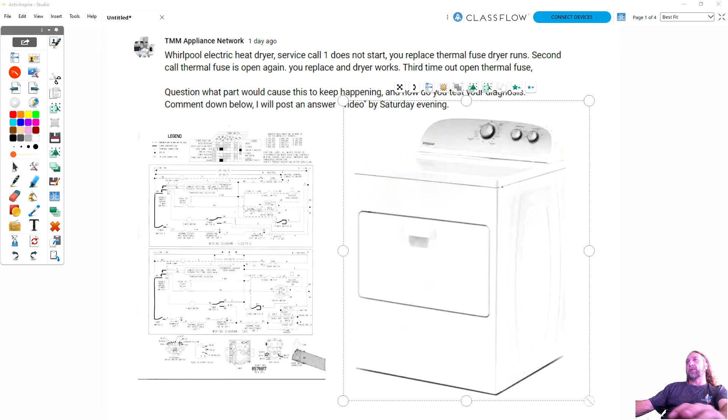This is an actual problem that happened to me in the field. And there's just some of those things that just stick in your head you never forget. So before I go real deep into this, I do want you to watch this video I got from Whirlpool's website. I can't get this screen to minimize, 1 second. Okay, and this video is made by Whirlpool, and it's going to talk about the air circulation. And this is important to know so I can explain to you what parts are there for what purpose, because in order to troubleshoot you need to know what those parts are there for.

Optimum drying performance is achieved through good airflow because good airflow pulls in outside air, heats air and blows it through the tumbling load, removes moisture from the load, deposits lint on the lint screen, and exhausts damp air. To ensure good airflow, clean your lint screen before every load by rolling the lint off the screen with your fingers. Do not rinse or wash the screen to remove lint. Warning: fire hazard. Use a heavy metal vent. Do not use a plastic vent. Do not use a metal foil vent. Failure to follow these instructions can result in death or fire.

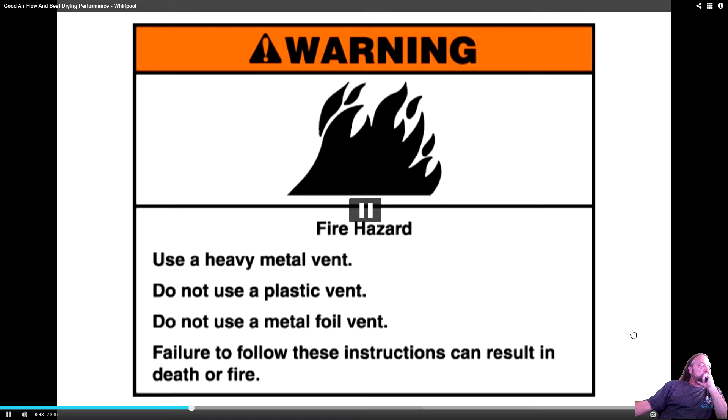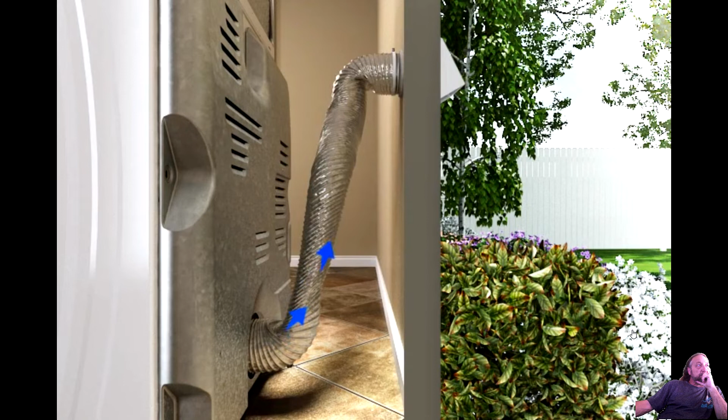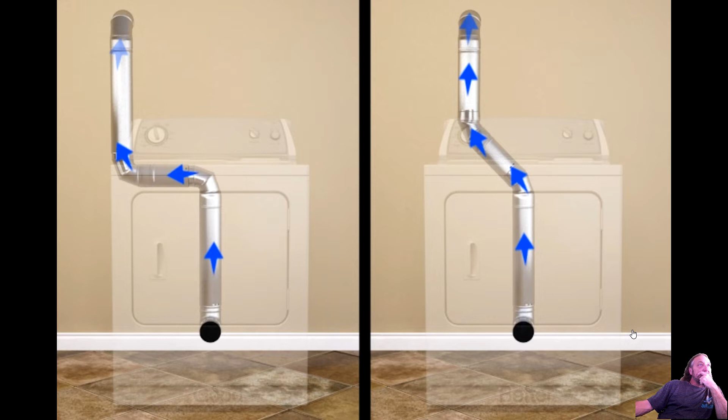Fully extend and follow the instructions of the dryer vent tag attached to your machine to ensure the minimum dryer distance from the wall. The excessive flexibility of foil and plastic vent material slows air movement, traps lint, and can be easily crushed. Replace plastic or metal foil vent material with heavy, rigid vent material that is 4 inches in diameter. Remove lint and debris from the exhaust hood. Remove lint from the entire length of the vent system at least every 2 years. Because dryers are limited in the distance they can move or blow air, be sure your system uses the shortest length of vent possible. Refer to the Use and Care Guide to determine the recommended vent length based on your model and installation.

Okay, I wanted to stop this video here because I got a lot of responses from people saying that the problem with the thermal fuse going bad was that it was a dryer vent problem. And believe it or not, that's what I thought. When I first went out there, I checked the hose behind the dryer. There was plenty of room. I mean, there must have been 3 feet on either side of the dryer. The hose ran maybe about 8 feet long and went to a pipe right out the wall on the side of the machine.

So I checked the hose, didn't seem to be kinked, connected everything back up, and blew the fuse again. So then I went outside, and where the vent is on the wall, I noticed that there were about 4 or 5 plastic bags of dirt stacked up right underneath the vent coming out of the wall. And I said, oh, well, maybe the bags were blocking the airflow. And I moved the bags, and it blew the fuse again.

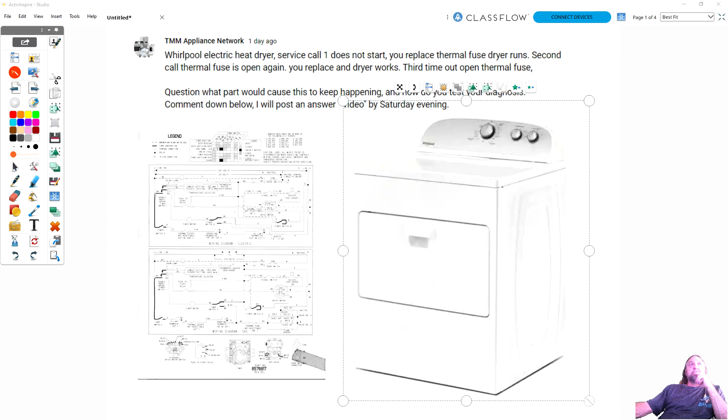This is when I said, wait a minute. This cannot be airflow. So let's take a look at this, and let's take a look at the back of the dryer. And let's identify 4 key components here. Okay, the first component is going to be my thermal fuse itself. I'm going to go ahead and put an arrow right here. That is our thermal fuse. That is the same as this one right here. And that's the one that is blowing, because that's the one that's controlling the motor.

But it's important. I don't know if you can see it too well. Let me see if I can expand my image a little bit. But if you look, this thermal fuse says 196 degrees. That means the airflow coming out of the dryer right here at the vent has to exceed 196 degrees Fahrenheit. That's when this piece will fail.

So then we got to look at what's right next to this piece. And right next to this piece we have the operating thermostat. The operating thermostat is right here. Now that is located here on the dryer diagram. Notice the temperature of the operating thermostat is between 150 and 155 degrees. So this piece here is supposed to sense the temperature of the air coming out of the dryer, and that'll be here.

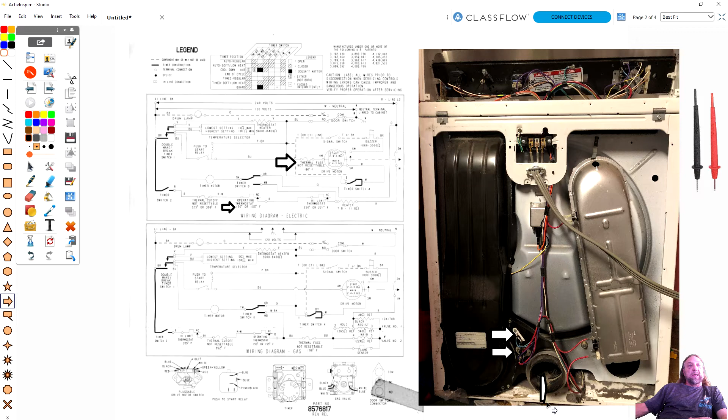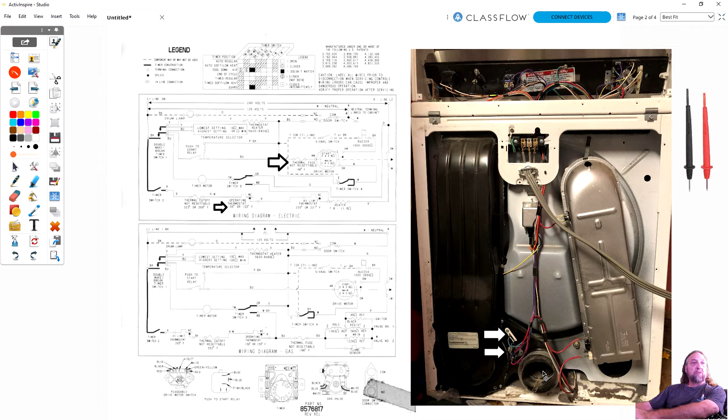I wonder if I can rotate this. It doesn't give me a way to rotate it. So that's no good. Oh, look at that. I just learned something. Hold on a second, guys. I think I can do what I want to do now. So if I go down with my arrow, I think I can draw an arrow going down. No, I can't do it.

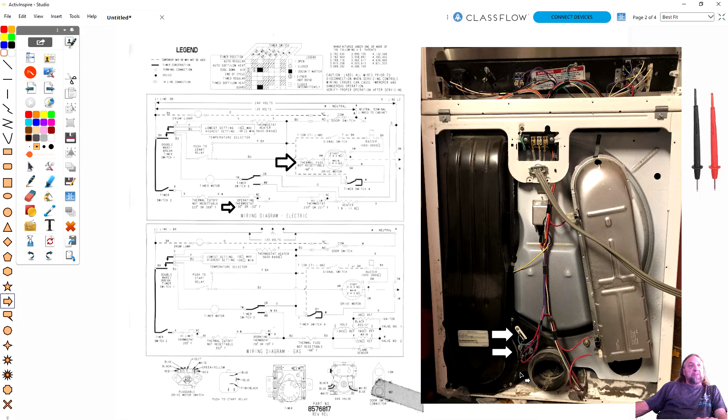So anyways, the air comes out of this vent here. The air coming out of here is controlled by this operating thermostat. As the airflow comes out here and reaches about 150 degrees maximum, it shuts the heater off, which is way over here. This is our heater housing right here, and the heater is the bottom half of this unit. So that's what controls the temperature. That's what turns it on and off, and that's what the customer selects.

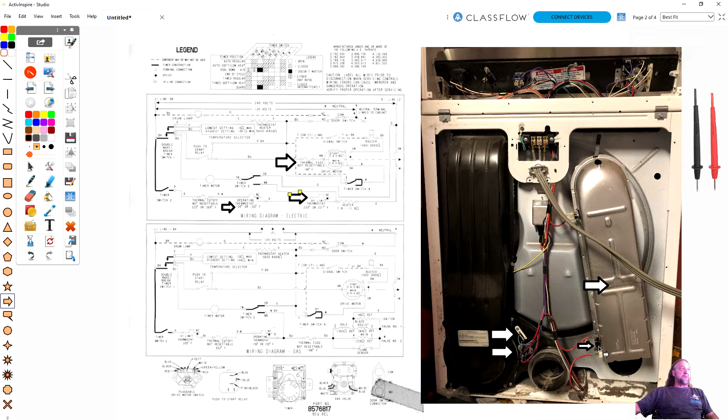But we have some other safety devices. We have another one right here, and that is our high limit thermostat. That one, if you notice, is at 250 degrees. That's located right on the heating element, and it's meant to turn off the heater in case the temperature exceeds 250. Then we have the final piece, which is right here, and that's our thermal cutoff, which is 352 degrees.

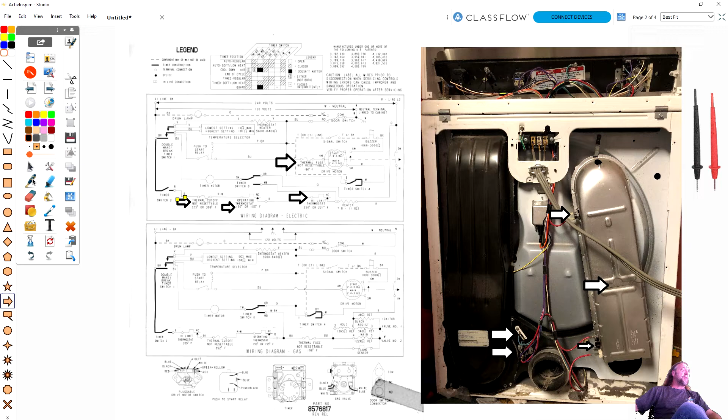Now, I showed you a video of air circulation. Let's talk about how air circulates, and then talk about the purpose of each one of these parts. The first thing that happens is that air is going to come in the dryer over the heating element here. Now the fan is located behind here, and I'll show you a picture in a minute. So this is called negative draft. Instead of the fan blowing onto the heater, it's pulling the air over the heater. It flows through here and goes through openings on the other side into the drum where the bulkhead is.

Now that would be, if I go back to this video for a second, this opening that you see right here with this blue arrow. This is the other side of this heating element that we don't see. It's right there. After it flows around with the clothes, then it goes out the dryer lint chute, and that is right here, the openings that we see right here. The air comes into the drum, goes over the clothes, and goes out through there.

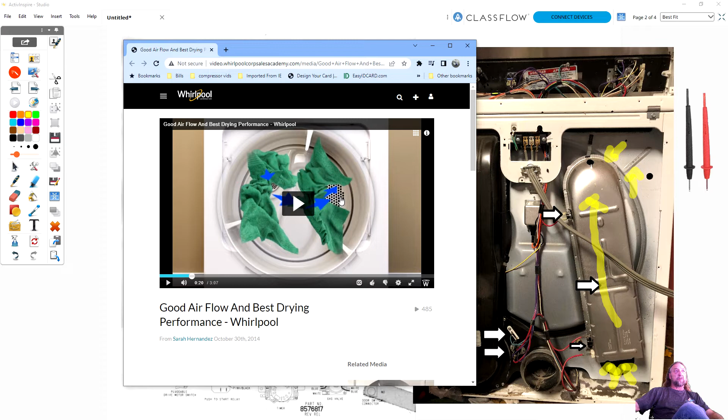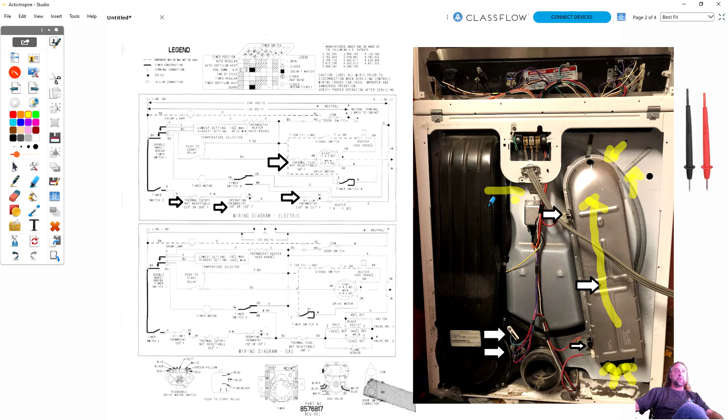Now that is also located on this bulkhead right here, and it comes into here. Your filters run down this chute here, and then the fan pushes the air out. Now, let's just say your filter was clogged.

The fan's not going to be able to pull any air in. So how are these two devices here ever going to see what's going on on the heater side? We're not pulling any of the heat over to this side, so these two devices cannot work.

Now, if you said it's a clogged vent, if the hose on the back of the dryer is blocked, if I completely block this opening, yeah, the fan will run, but it's not pulling in air over the heater. This will cause this whole heater housing to excessively overheat. First thing that's supposed to happen is this high limit thermostat, that's this one right here. When it senses there's no airflow, that whole heater box gets so hot at 250 degrees, it's going to shut the heater off, and it's going to try to prevent a fire.

Now, if this one fails to control the heater, then we have our thermal cutoff, and the thermal cutoff is at 352 here, and if this piece fails to turn off the heater, or if our heater is grounded, and I'll explain to you about that later, this cutout will shut off to prevent a fire in case these components fail to turn the heater on and off.

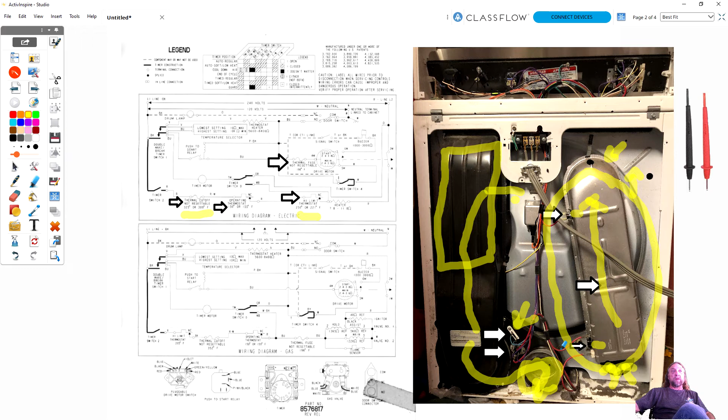These devices on the other side here, they're not seeing the heat that's going on there because your vent is either blocked here or blocked coming out. You're not pulling the air you need to pull across these two devices. Now, how do these work?

Well, if you've got proper airflow running all over the dryer, and I'm going to clean up some of these lines for a second. If you've got proper airflow running over the dryer, then it's going to sense the temperature of the air coming out the vent, and the operating thermostat, which is located right here, is about 150 to 160 degrees. This is supposed to open and turn the heater off. Now, if the vent's blocked, it can't do that.

Now, what if the thermostat, by mistake, can't open, can't turn the heater off? Well, the temperature coming out the dryer is going to keep getting hotter throughout the whole box, but when it reaches 196 degrees, this thermal fuse will fail. And at 196 degrees, it's still lower than this 250, and it's still lower than this 352 here. So these components don't come into play if our operating thermostat fails to cycle the element.

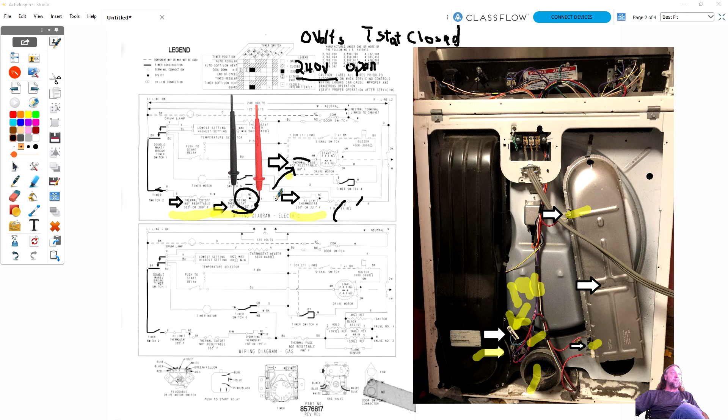I went into the customer's house thinking, oh, I got a thermal fuse. I had it in my pocket every time I walked in their house. But that doesn't mean I fixed the problem. That only got the machine running. I never took the time to test to see if this was cycling or not. Now, if you got 240 here and you're still climbing up in temperature, the only thing that could happen is the heater could be grounded.

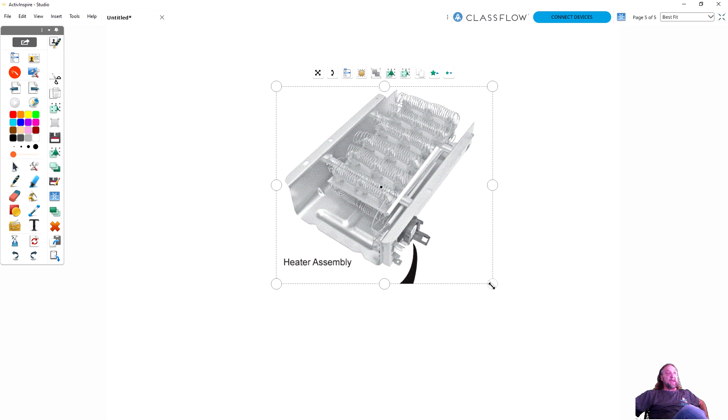So let's take a look at this picture here. Here's a heating element. They redesigned these back in the late 90s, and it used to be a lot longer. They changed to the short one to make it easier to replace, but it's hard to see right here. There's rows on the front and rows on the back, but right here, this top piece goes across the top of this metal divider to feed the other half of the element.

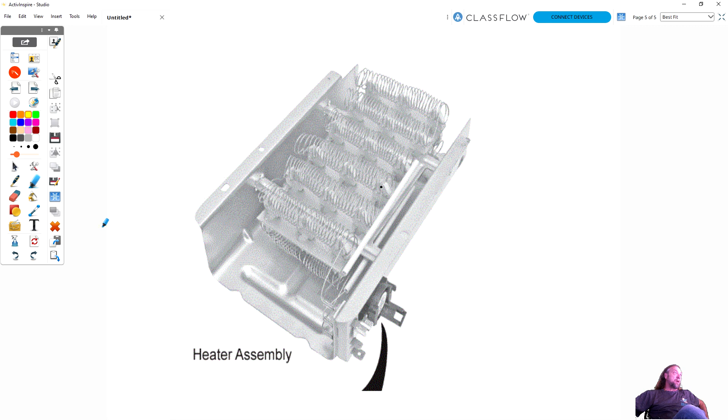So power comes in through this wire, goes through this element like this, and then here it jumps to the other side of the element, and then it comes back out another wire on the bottom. But where it crosses here, if there's not enough airflow, this element will sag and touch the metal housing and ground out. And you would think, oh, well, that would blow a circuit breaker if it shorted out.

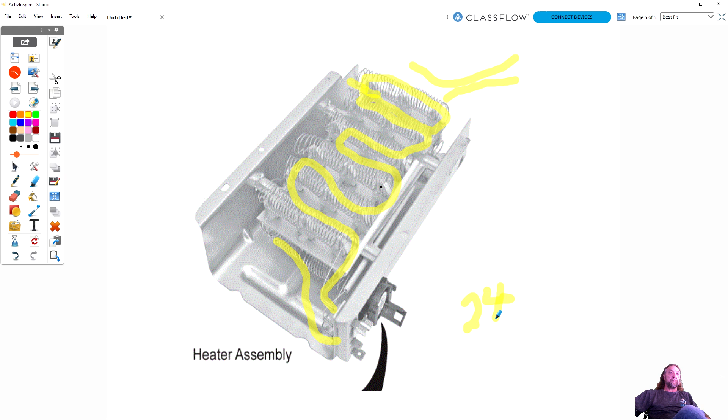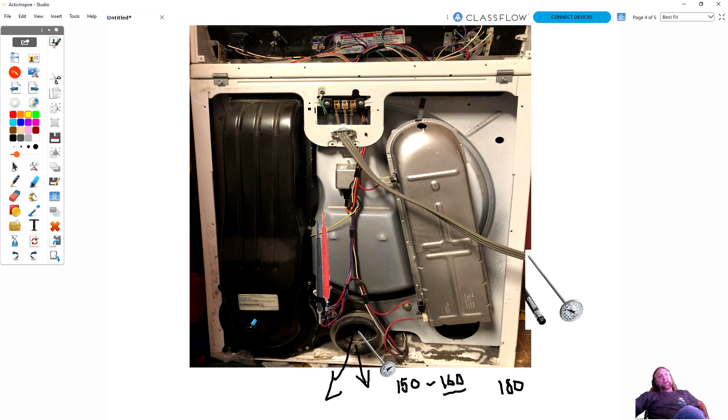Now if you cut the heater right in half, normally the heater runs off of 240 volts, and if you put half of it to ground and neutral, you put 120 to both sides. So if a thermostat does open, it turns off half of the heater, but the other half is still running without any temperature control. And that's where our thermal fuse came into play and shut the unit off. So bottom line, it's not so much an airflow problem as the operating thermostat was not controlling the temperature.